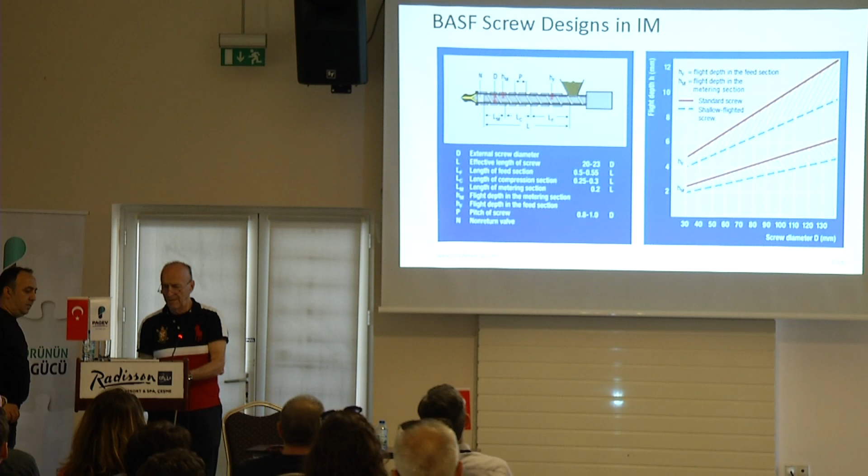Some people, Greg Campbell among them, say that rotating the barrel versus rotating the screw is not 100% identical. He's got some arguments. The result is that if the screw is shallow, has shallow channels, there's not really much of an effect. If it's a very deep screw, yes, there is an effect. But in extruders, the channel is shallow, not very deep, so there's no question that the approximation I'm using here, and also in my software, of rotating barrel, stationary screw, is really valid. But if it's a deep channel screw, very deep, there might be some differences.

We managed to do a thought experiment, what Einstein used to call in German, Gedanken experiment, for those of you that speak German. It's a thought experiment. We managed to form a device that could operate as a melt pump.

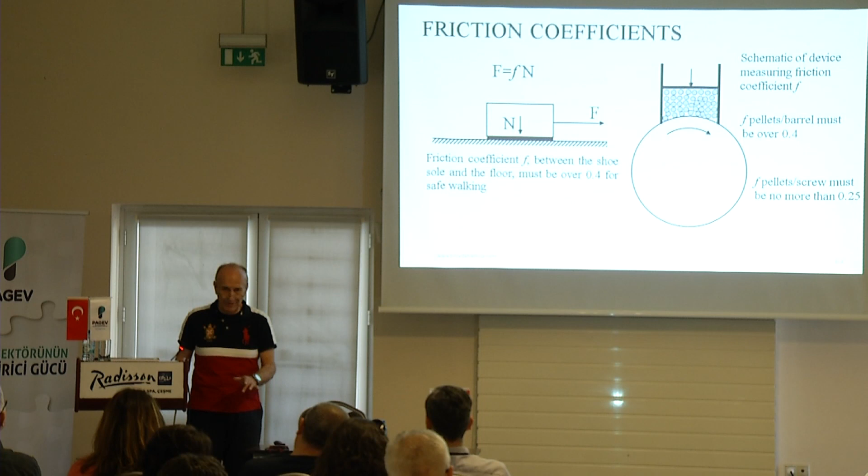My estimate is less than 0.4. It's a bit, which means in order, let us say, you need 40% of my weight to pull me forward, right? The friction coefficient in North America, because in particular the United States, when you place a floor anywhere, the lowest friction coefficient allowed formally is 0.4 between a typical shoe and the ground. Now, this one is a bit higher, and if somebody fell, the hotel is a bit responsible, and I have worked on a couple of cases as a consultant, like somebody fell and money is big.

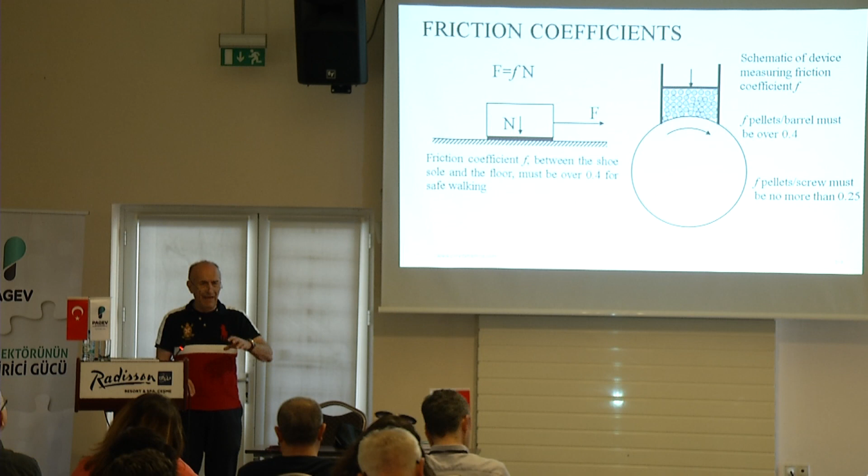So on the barrel, the friction coefficient should be at least 0.4. On the screw it must be shiny, low friction coefficient, should be about 0.25. So these are the ranges of friction coefficients that we like to have. On the barrel we like a coefficient of 0.4, and on the screw about 0.25. These are default values. I have a software package, which I sell commercially, with default values for a smooth barrel and a typical screw: 0.4 and 0.25, in order for the extruder to function in a normal way.

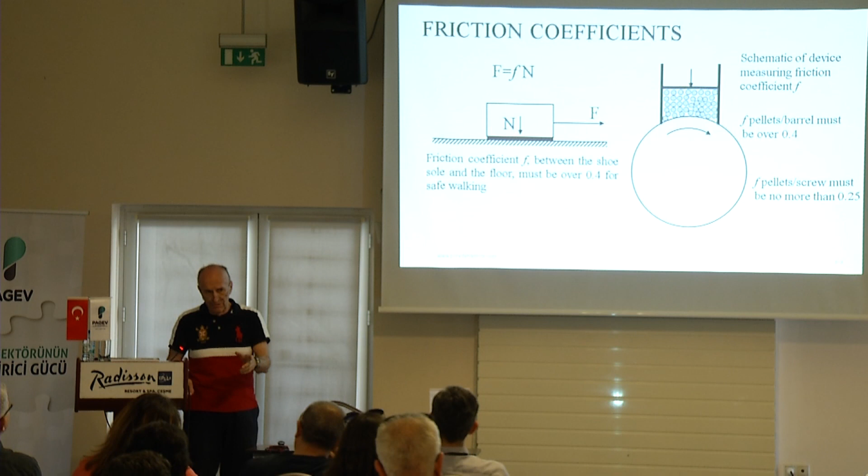Now, if I have a screw that is corroded or damaged, obviously the friction coefficient of 0.25 is going to go up, and it may not produce properly. I'm going to show you later on some screws in pretty bad shape, okay?

So I say the same thing again: solid bed, the barrel would have to have 0.4 and the screw 0.25. And typically then the pressure variation along the screw will be of that shape. This screw in that particular case is going to be a gradual build-up. Here we are compressing. This is the typical design of a screw: a straight portion where we do the feeding, then compression, which gives a pressure rise because you're compressing it, then a straight portion which is the metering section, and then of course a large pressure drop in the die. So this is what you get.

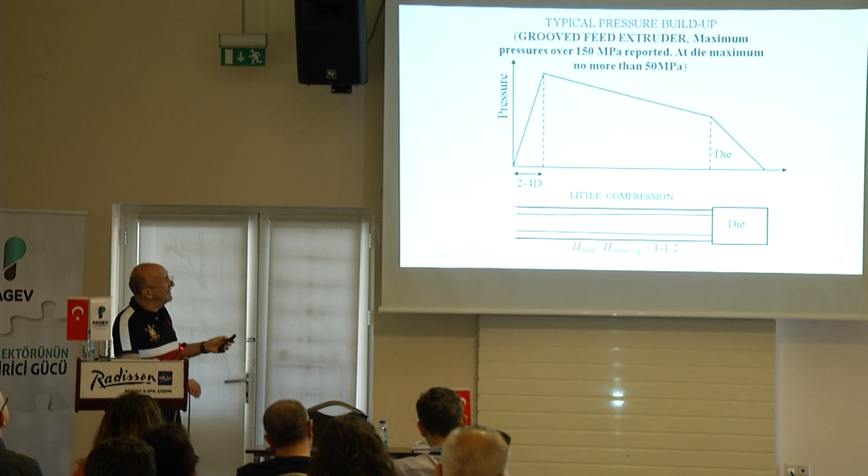So the pressure is very large, and you may really have problems, and it's rather difficult to design grooved feed extruders. Everybody can design and build smooth barrel extruders; it's not a complicated machine. You can buy a screw from somebody or design it and fabricate it yourself. But when it comes to groove-feed extruders, it's complicated. Yes, in Turkey, I know and have contacts with one company that produces groove-feed extruders. They're very good, they pump out a lot of material, because why?

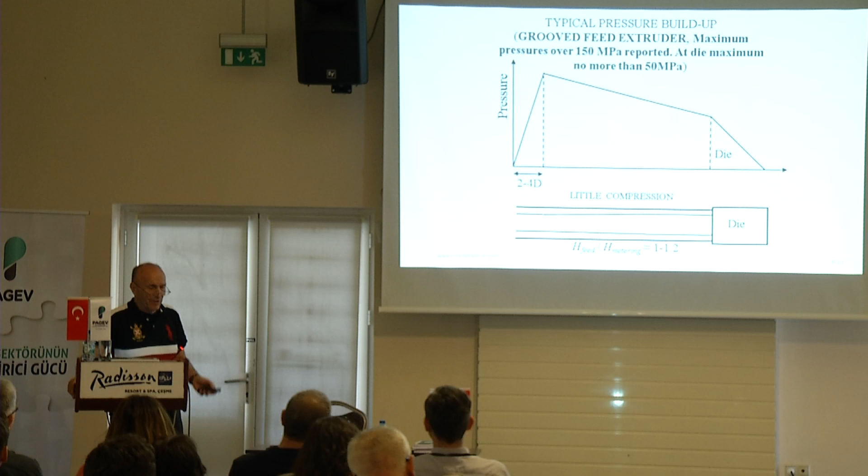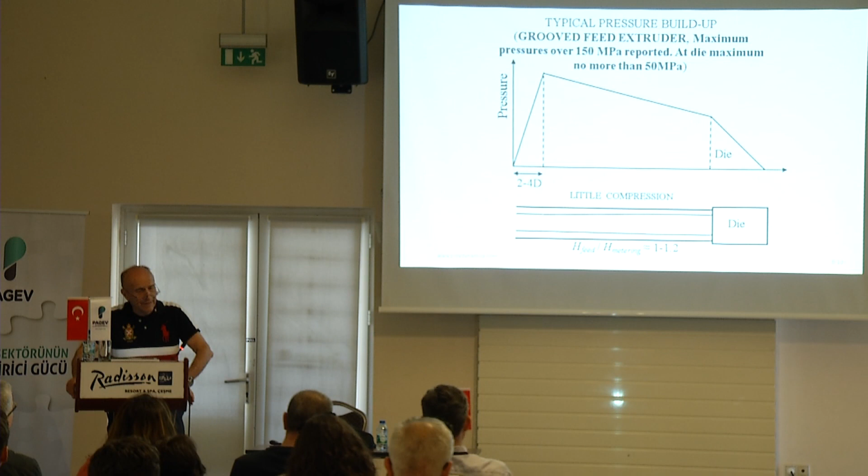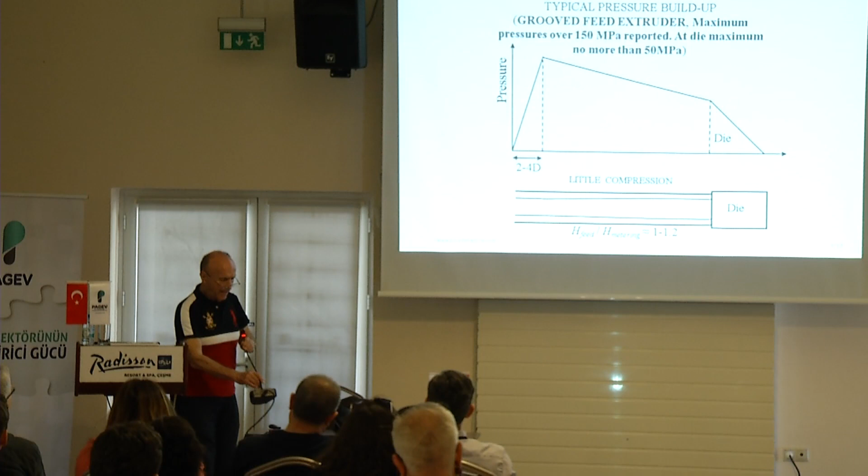Anything beyond that is probably too much. However, in the grooved feed extruder, we have at the start at least 150, and probably 200 and so forth, that is pushing the polymer. And right here, this screw does not need any compression, it's practically one. There is a little bit in this one, either no compression or 1.2 or something like that, just a little bit of compression. So there's a fundamental difference between screws for groove feed and screws for smooth barrel extruders, and the difference is that the pressure that develops is very large.

Now, do you see any problems? And I'll tell you what the problems are. Do you see any problems, potential problems, with groove feed extruders? What sort of? Say that?

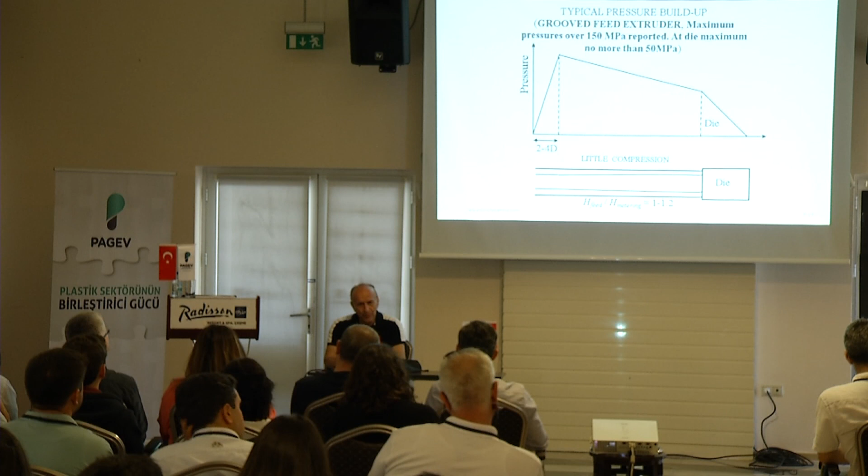If the polymer is too soft, it's not suitable. If you have flakes, you want a pellet that is hard but not super hard. For HDPE it works very well, polypropylene works very well. If you get something like polycarbonate, I doubt it would work.

Soft grooves? What kind of soft grooves are you thinking about? Soft groove and hard groove feeding, they separate in two in the articles which we read. Yeah, there is another idea which says there are soft grooves and hard grooves. Soft grooves make it easier to feed also some flakes as well.

Generally, the feed material can be problematic, depending on what kind of material you feed and so forth. But they work very well, you know. If you have good pellets, but with other stuff, sure, it may work. But my experience is that I would recommend grooved feed extruders for good material, good pellets.

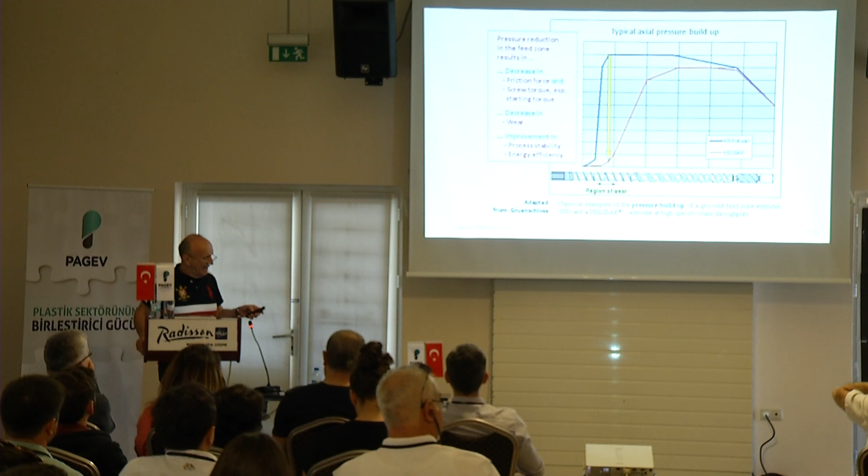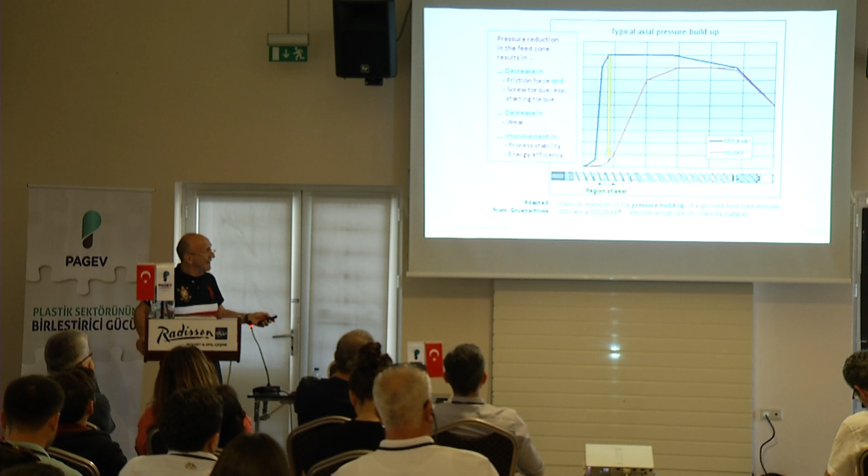In his case, he claims at least that with the entire barrel grooved, the pressure is more gradual, and eventually he gets higher output. To tell you the truth, I'm not quite sure how it works. The analysis is not exactly clear why it works, but I'm just presenting you the results as I see it.

There have been contributions on very high speed single screw extrusion by Wortberg, and by Battenfeld Cincinnati. Some of you may know the names of John Cristiano and others, and Cristiano reports from a 63.5 millimeter, that is 2.5 inch, extruder. At 1200 RPM, you get 1400 kilograms an hour, which is a lot.

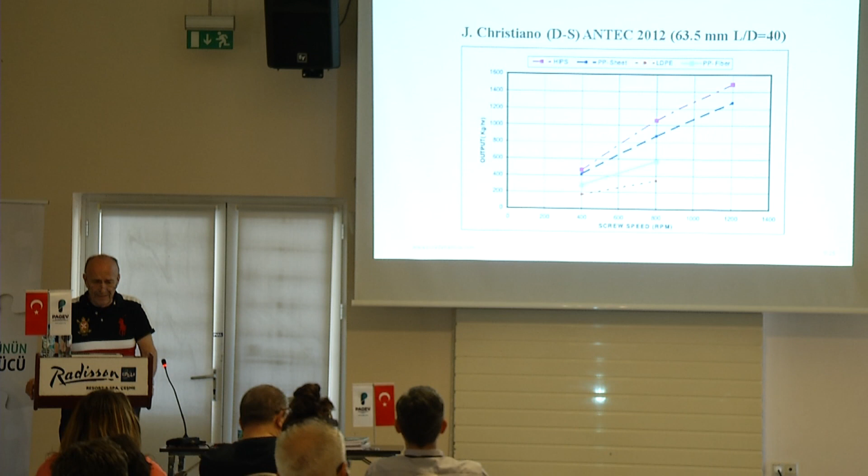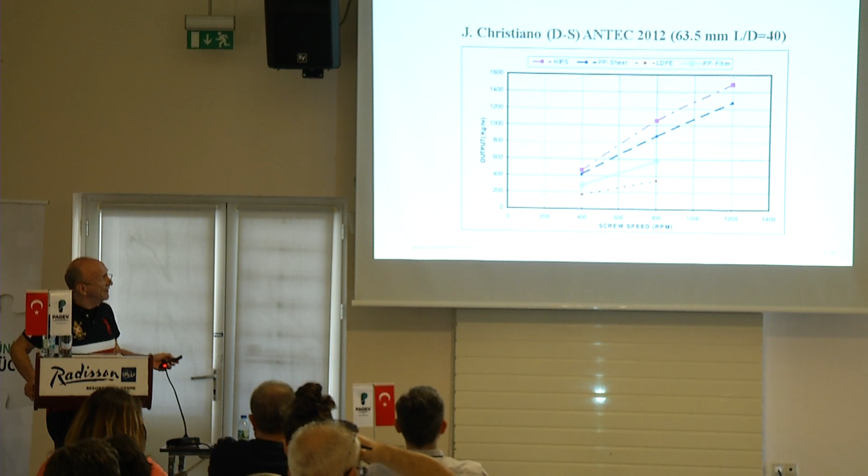There are reports, there are references, and you can check it for yourself. This is some result, again from Cristiano, from Antec, as you can see, what kind of outputs you get with this kind of high-speed machines. L over D is rather large, but you see 1400 for that kind of material, 1200, it's a lot of output.

Now, the same thing is shown from Battenfeld Cincinnati, which is a very well-known German company. I know they sell a lot of extruders, also in Turkey, I know they sell extruders. As you can see, you get a lot of output, although they did not specify.

This is from a plastic pipes conference in Berlin in 2016. I attended, and I have the proceedings, and you can see sort of what outputs and temperatures you get. But they don't say the screw RPM, it's normalized, I guess, for reasons of proprietary knowledge. They do not disclose it.

The problem I had with these extruders, they are fine machines, great output. The problem I have is mixing. You pump out a lot of material, but I told you this morning that mixing is very, very important. To start with, any extruder, whether it's slow or fast, it is not a very good mixing machine. Although you see things rotating and whatever, you add a Maddock dispersive mixer, but it's not a very good mixing machine.

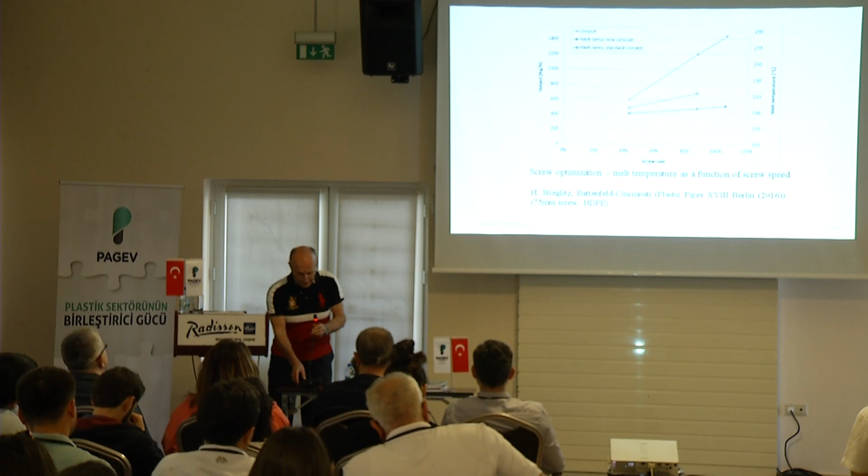If you really want to do mixing, good mixing, you need co-rotating twin screw extruders with wide discs, what I showed this morning. With single screw extruders, mixing is never very good. And when you have high outputs, it might be worse, okay? Some people, I told them, you may not need the output. I've been in extruder plants where they had high output, high speed, but they didn't really need it. They needed quality. So something to think about when you buy or when you inspect an extruder plant.

Now, for power requirements, the calculations are rather simple. What we want to do is calculate the power that is inputted by the screw by determining the energy required for the polymer temperature to be raised, the energy required for the temperature to be raised from room temperature to, let's say, the extrusion temperature of 250 degrees; the energy required to melt the polymer, meaning the energy we have to supply to overcome the heat of fusion, which is the opposite of heat of crystallization; and the energy required to pump the polymer.

Here I do some calculations, explained after that, and from them you will see that most of the energy inputted comes from the rotating screw, which is what melts the polymer. The heater bands only contribute a small amount. Most of the energy, 80%, is coming from the rotating screw.

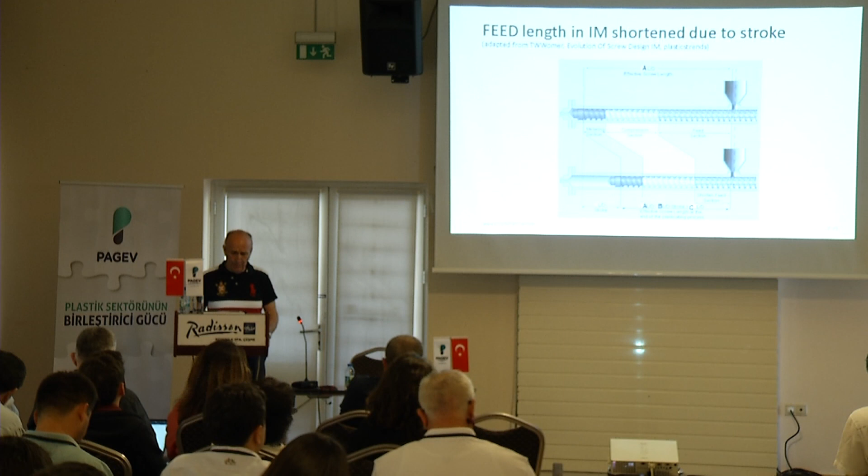The differences between screws in extrusion and injection molding: generally screws used in injection molding are shorter. In extrusion, we need the extra length because we have to build pressure, built up by the long metering section, which is not the case in injection molding. So generally speaking, injection molding screws are less sophisticated, simpler. However, they're getting improved in recent days. I have some numbers there for you to look at.

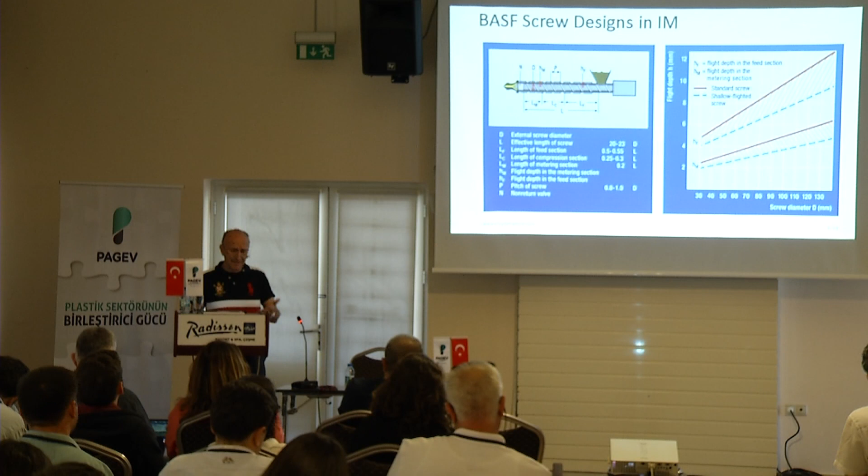Helix angle - there are some recommendations from BASF. Again, these are numbers for you to look at. If you're at a university, you may want to give it to a student for a screw design and so forth.

Now we come to a very, very important subject. After groove feed, the most important subject is the question of barrier screws. What is a barrier screw? Well, first of all, it's not a double-flighted screw.

In a barrier screw, we have a main flight and a secondary flight. It's also possible to have a double-flighted screw - you have one screw and then a second. This is a screw design, but it's not a barrier screw design. Read my lecture notes, my book, for more information about this and why they might sometimes be beneficial.

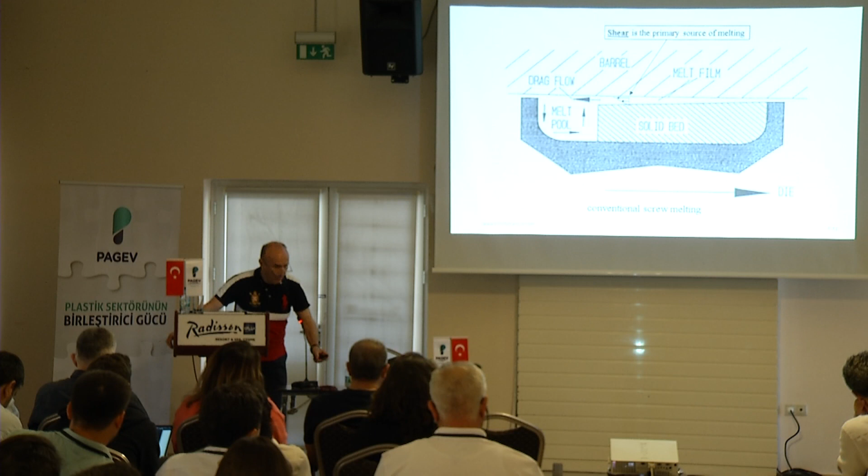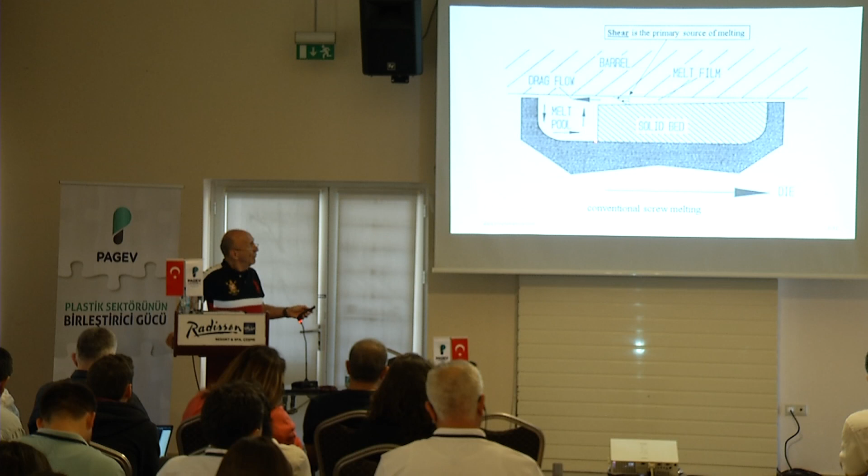Now, how was the screw design developed? We have this melting mechanism from Bruce Maddock, where we separate the solid bed from the melt pool. Well, what if we actually put another screw right there, where the solid bed ends - a barrier screw, to separate the solids from the melt pool? That's the basic principle, but this principle has generated a lot of designs.

Okay, this is the screw without a barrier. What I pointed out already is that if in the channel I have unmelted pellets or chunks of material that haven't been melted, they just float, or swim, really, in the melt. They are not likely to get melted, so it's better to squeeze them, to force them against the barrel.

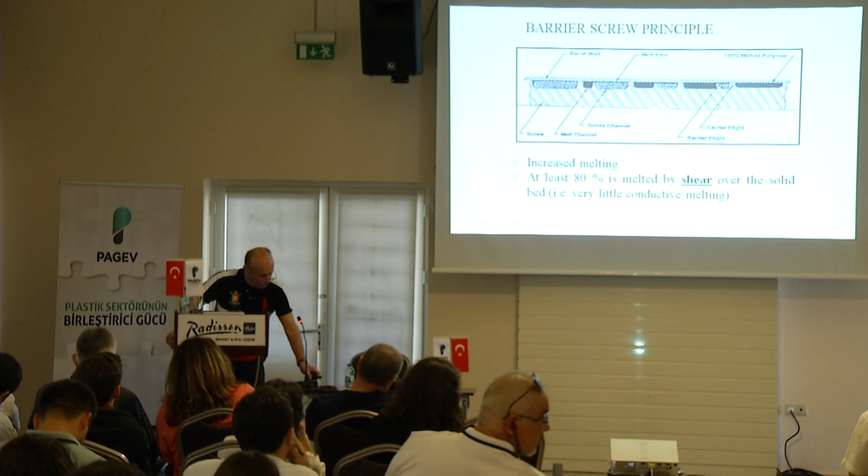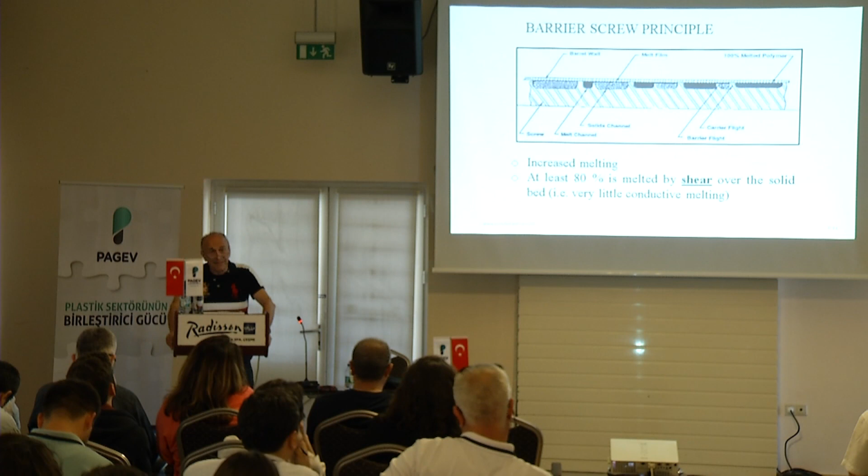And this is the birth of the barrier screw. You see, now I have the previous geometry, but I segregate the solid bed from the melt pool, and eventually I only have 100% melt. So this is a better melting machine, all right?

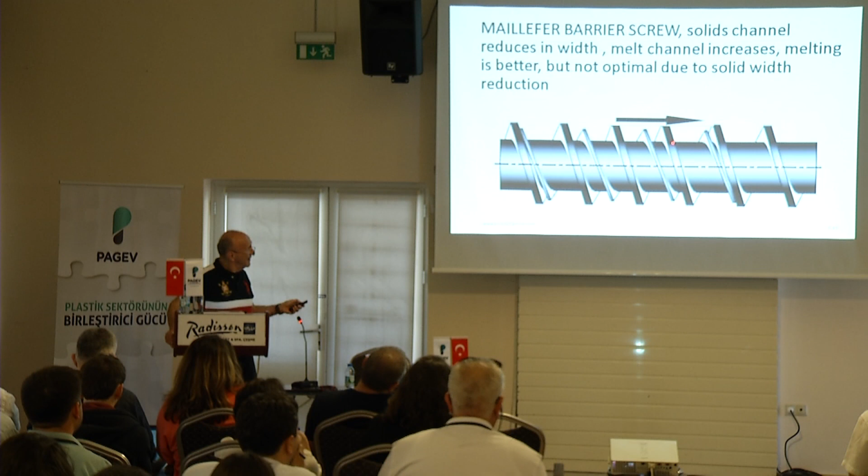This is a sketch closer to a mechanical design, as invented by Maillefer probably around 1960. You see, you have the main flight, and you have the barrier flight. In this section you would have solids, and right here you would have melt.

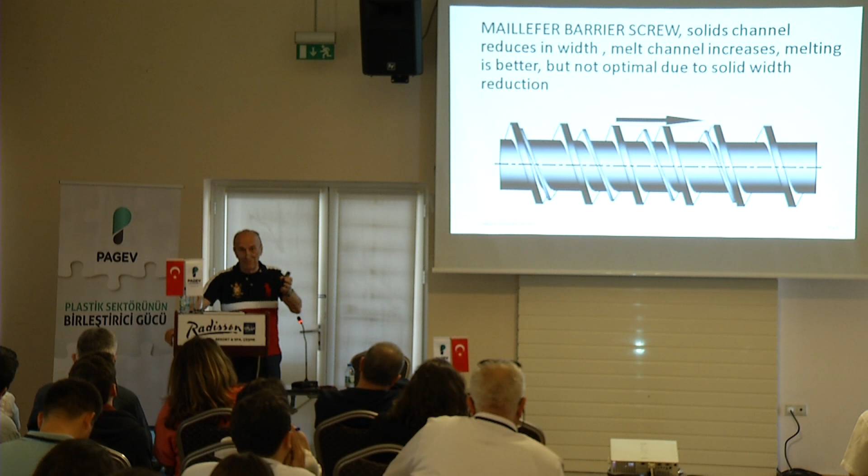So the solids part becomes smaller and the melt becomes bigger, and hopefully - this is more difficult to design, because how do you know whether solids have been melted and how much? This is tougher to design, but they work very well. I would say most modern screw designs are of this variety.

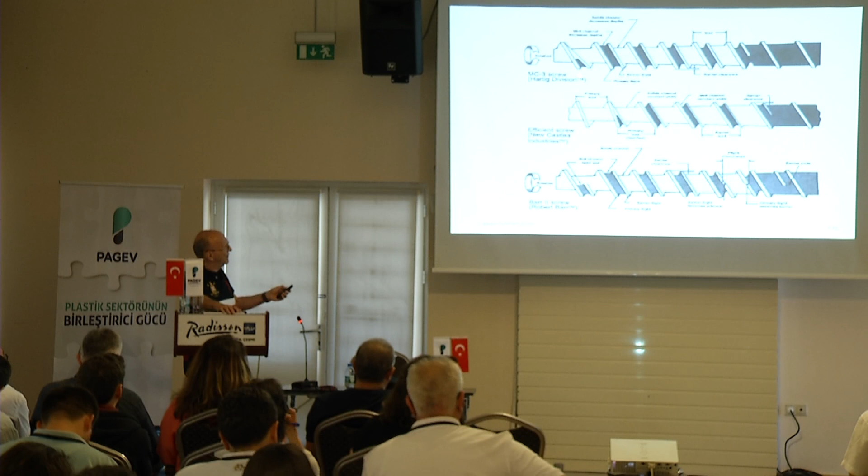That is, they are barrier screws, and they are different - a lot of patents out there. This one, over there on the top, is referred to as the MC3 or HDPE screw, whatever. It is really the Maillefer screw.

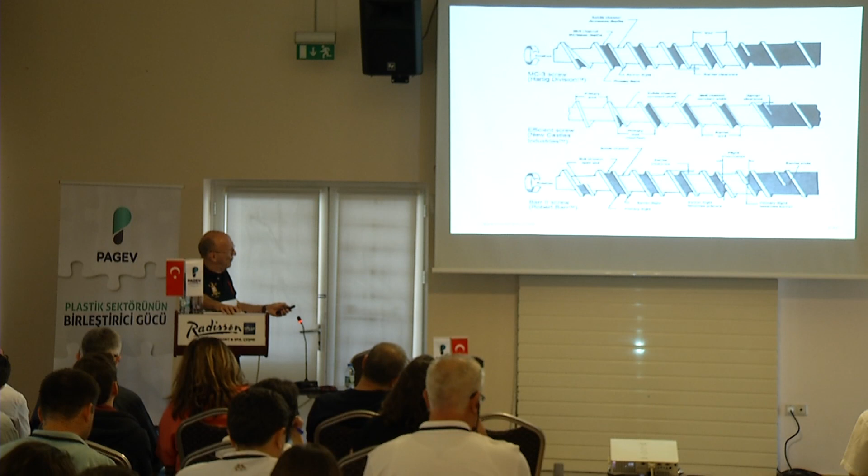This is another one, the Barr 2 screw, in which case you can change either the depth or the width of the channels. In the Maillefer case, the width is changing; in the other one, the width remains the same.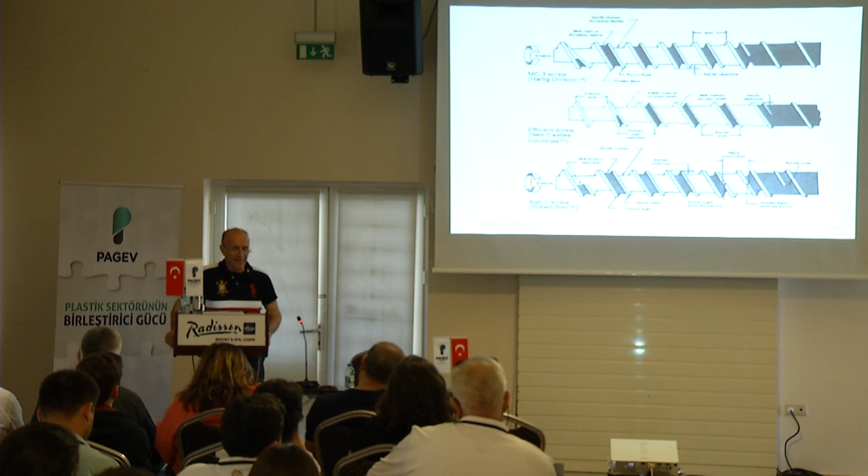So there are a lot of different designs. You will find some references in my book, but there are different designs that work very well, and most likely any modern screw you see anywhere is going to be of the barrier variety, like this. Generally speaking, it's more difficult to design them.

I do have a software package, and I use it, and it is used in industry to do mixing sections. Well, I think I've already mentioned that single screw extruders are mostly melting and melt pumping machines. There is no dispersive mixing, really. In the barrel, what I'm doing is shearing all the way through.

So it makes sense to add a mixing section. Perhaps the most common and most successful mixing section is the one proposed by Maddock - same guy, Bruce Maddock, who did the experiments on mixing. What happens is the polymer gets in there, and here it has something like a barrier, forcing the polymer to travel over this barrier to the next channel. And here is the view on the other side.

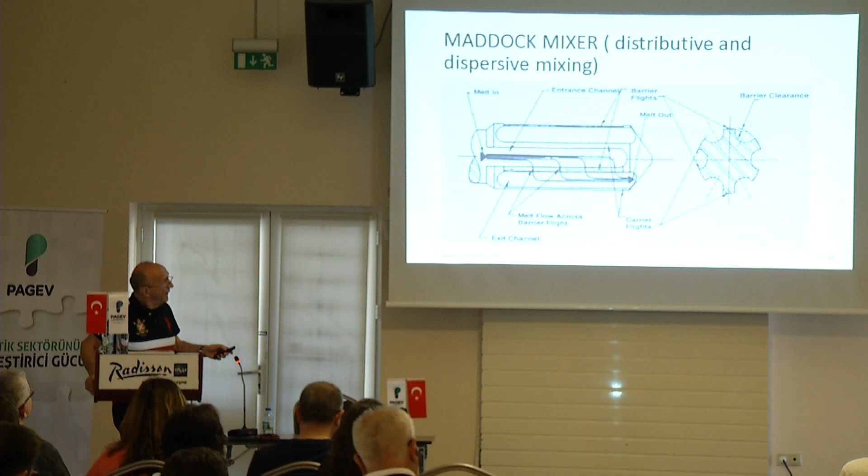And this is another picture - I have this one from Bruce Maddock himself, he gave a talk a few years ago. You see inside the channel you do have some circulation, which is good for distributive mixing. And over this barrier, as it goes over, the polymer in this region is being squeezed, which means the flow is elongational. That is why these mixers are referred to as dispersive mixers, like Maddock, and there are other variations.

In fact, this so-called Egan mixer is again distributive and dispersive. Again, you're forcing the polymer to go over - you have the polymer there, now it is slanted, not like a barrier, but you're forcing it to go over this barrier to the next channel. Some people think the Egan is a little bit better than the traditional Maddock mixer.

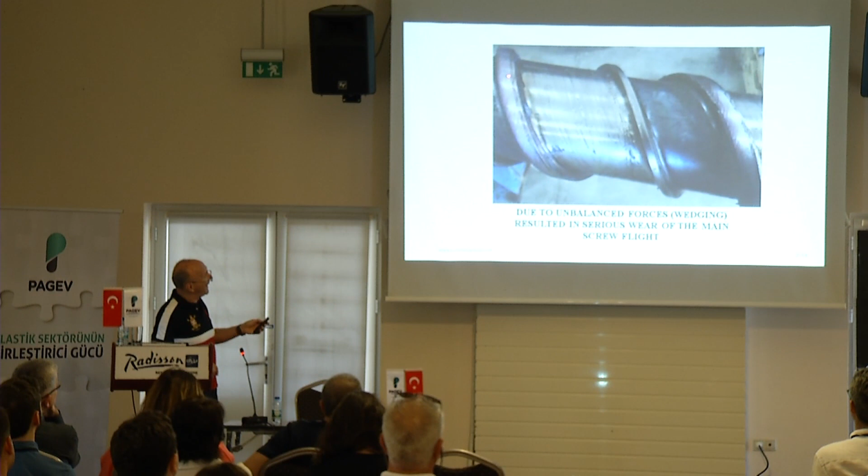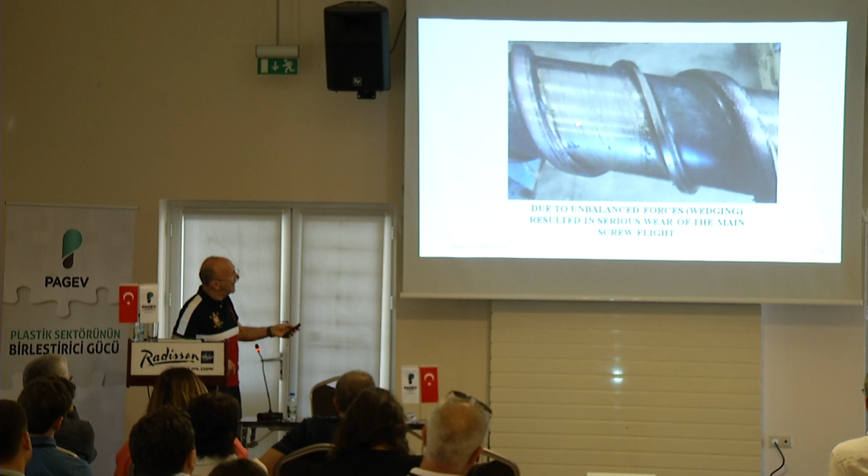What happened is, in this case, you see, what happens is that this screw, the flight, was pushed against the barrel, and you see something is cut off from here. Now these pieces of metal, they go inside, and of course they scratch the surface of the screw. And of course the customer is complaining. He says, well, we don't get output, poor performance.

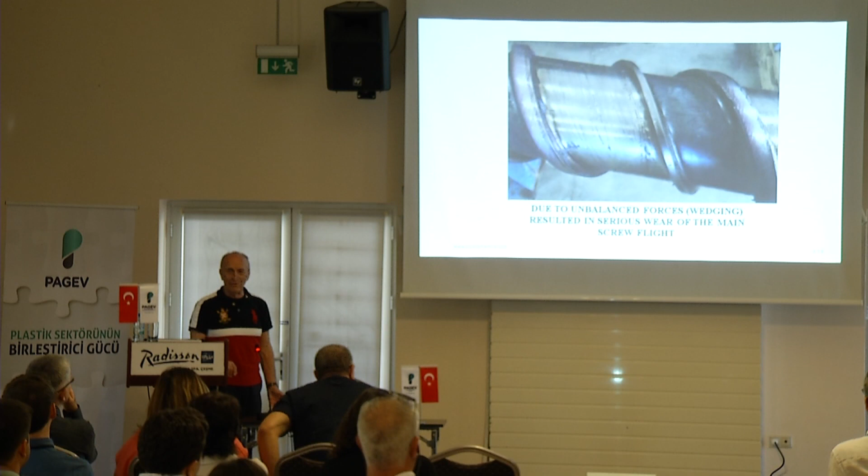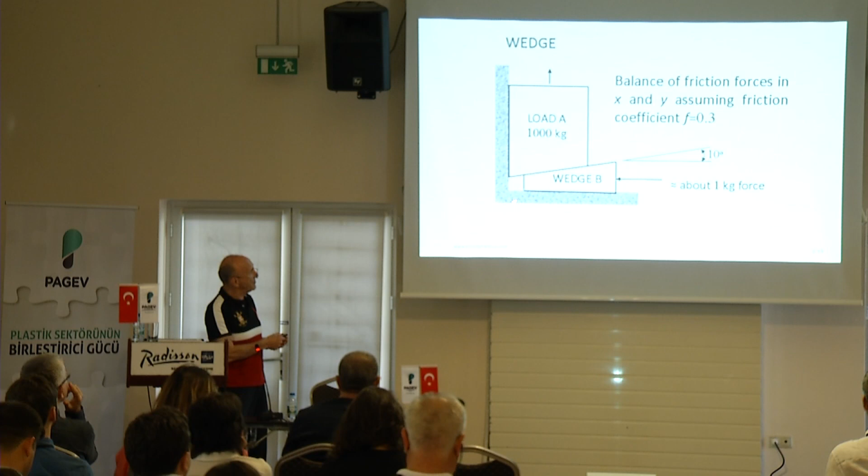Well, what do you expect? Now, why does this happen? It's a classical case of bed wedging, like a wedge. What is wedging? Well, you know that. This is a typical homework assignment that I did in high school. You put a wedge here, and you force it down, and you can lift a lot of weight with a wedge. The same thing happens in the screw.

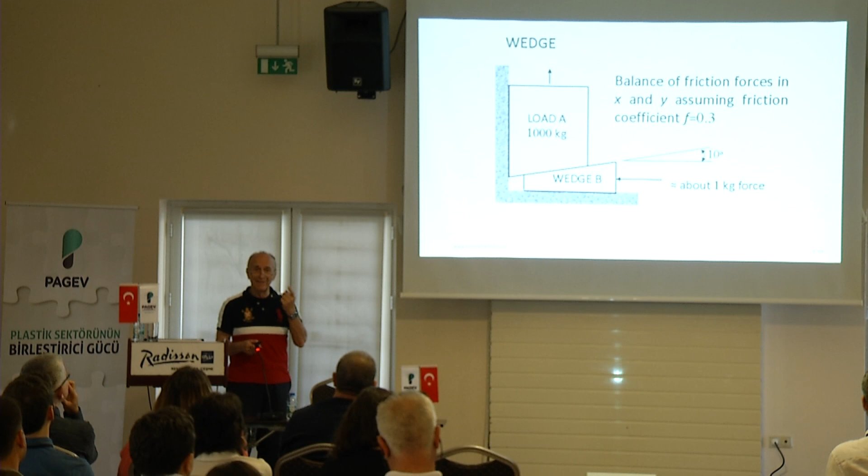A little bit of solid polymer gets somewhere on the screw, pushes one side of the screw against the wall. It doesn't take very much. You see, let's say this one with 1 kilogram force - this is a typical high school or first year mechanics problem. With 1 kilogram, you can lift 1,000 kilograms, so that you bend the screw.

Jim Franklin did some calculations. I'm not sure how he measured or did it, but anyway, my calculations from a simpler experiment of bed wedging with first year university mechanics gave me pretty much the same results. Occasionally, there's melt blockage.

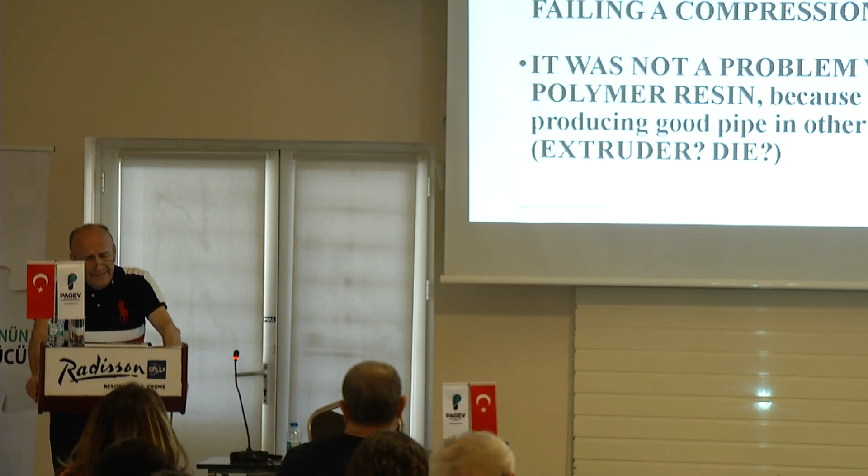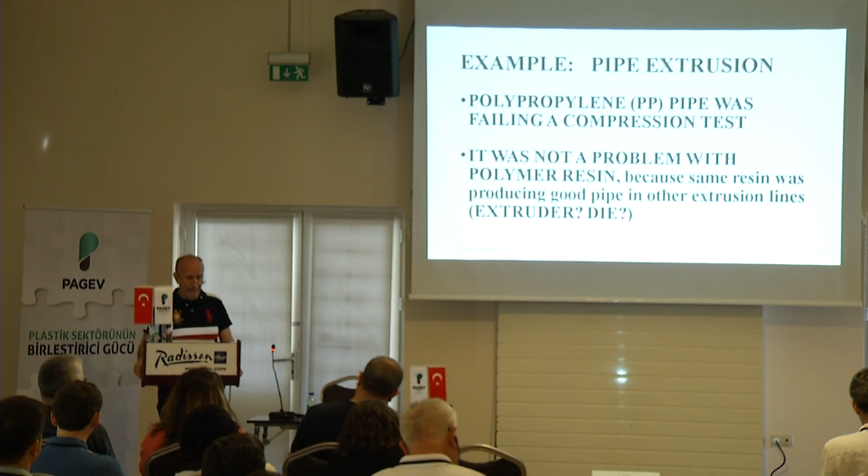I'll give you an example of pipe extrusion. It was in Europe, a northern European country. The material was polypropylene, and it was production of corrugated pipe, and the material was subjected to a compression test.

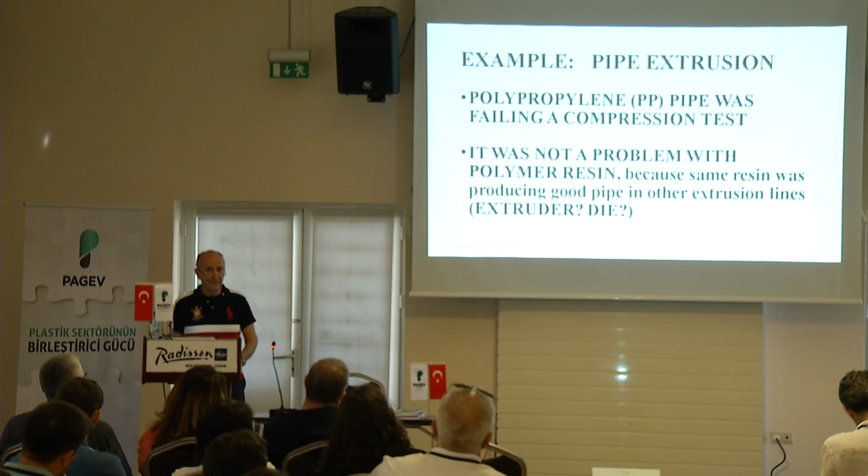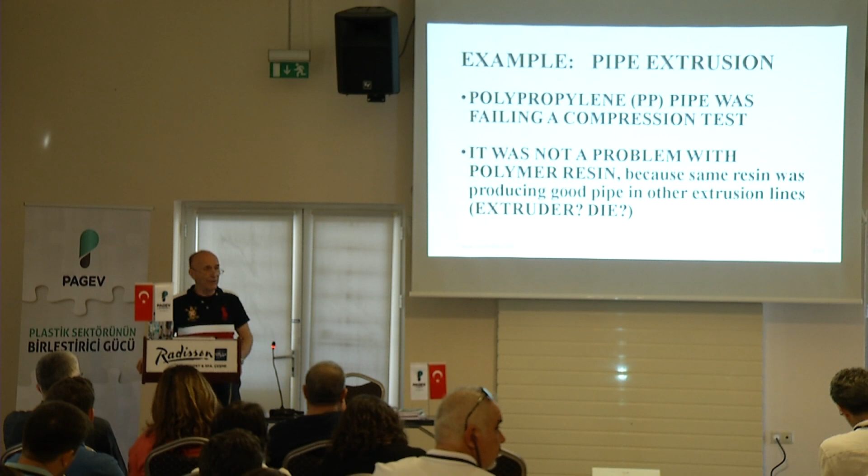We were trying to figure out where the problem material was coming from. We thought in the beginning that it was a problem with the resin. We took the resin and measured viscosity, tensile testing, and it passed all our university tests. However, in the plant test, a compression test, an ASTM standard test, it would fail. Question is why?

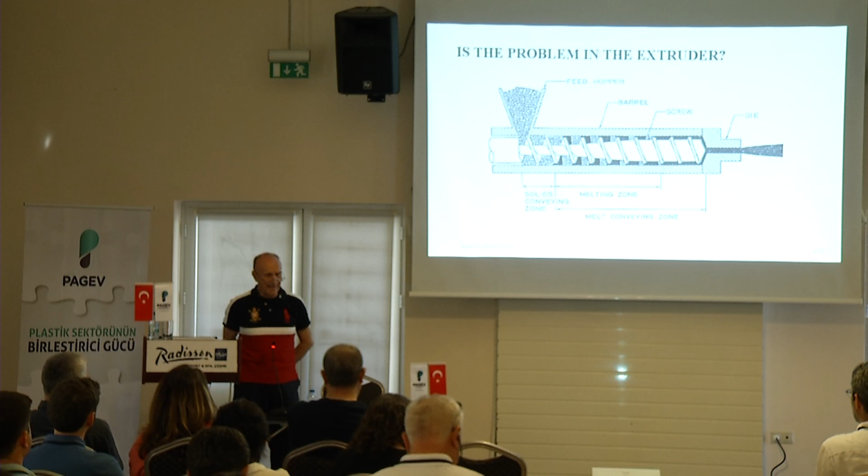I suspected the extruder, because polypropylene does not melt as easily as HDPE. I knew that the supplier of the extruder and the screw had a lot of experience with HDPE, and I thought maybe these people used a similar screw design. So I suspected that one.

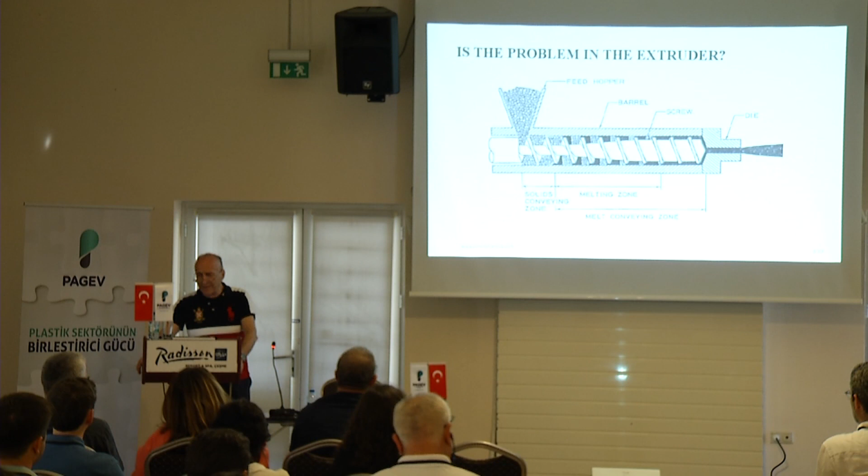There was nothing unusual in the die. I checked the die, and there was nothing there. So I suspected, again, that I probably had trouble with the screw design itself.

Because what is known in industry in general is that polypropylene melts about 30% less than HDPE under the same conditions. I'm not really sure why. We did some work and might take another look at it, but I'm not quite sure why. The net result is that polypropylene is rather difficult in melting.

So we wanted to see what really happens, and I did a computer simulation with my extrusion software package. It was a very long screw, L/D 40. I discovered that at the end of the screw, the software determines the melting. At the start, under the hopper, you have 100% solid, and we determined the width of the solid bed. At the end, we had quite a bit, about 10% predicted unmelted material.

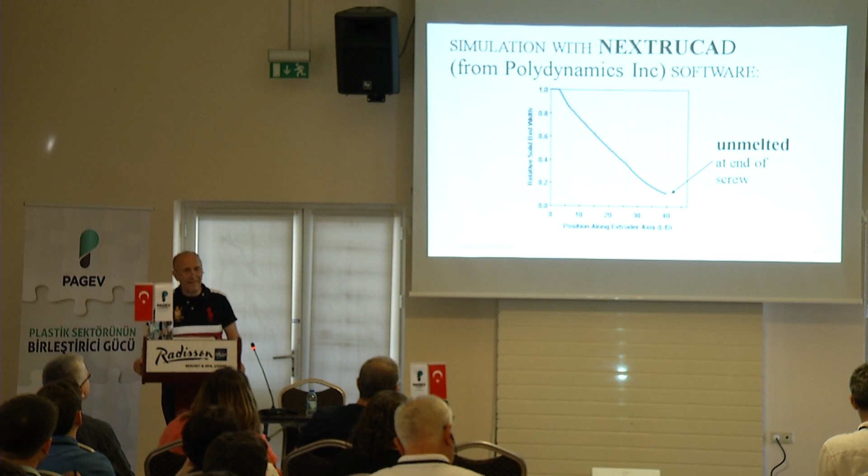But again, would they trust me? The extruder manufacturer questioned the ability of my software, asking me about parameters, and some parameters, truly, I would have to guess. What is the friction coefficient between polypropylene pellets and the barrel? Well, I guessed one. Did I measure it? No, I made a reasonable guess. So we could not really convince them.

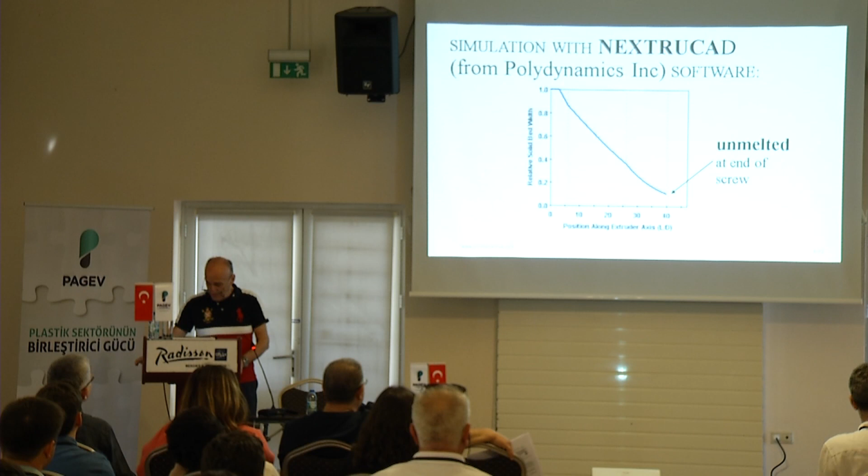Material is unmelted. If you have material like this, you're not going to make good pipe. That was the problem. A new screw was designed, and the problem was solved.

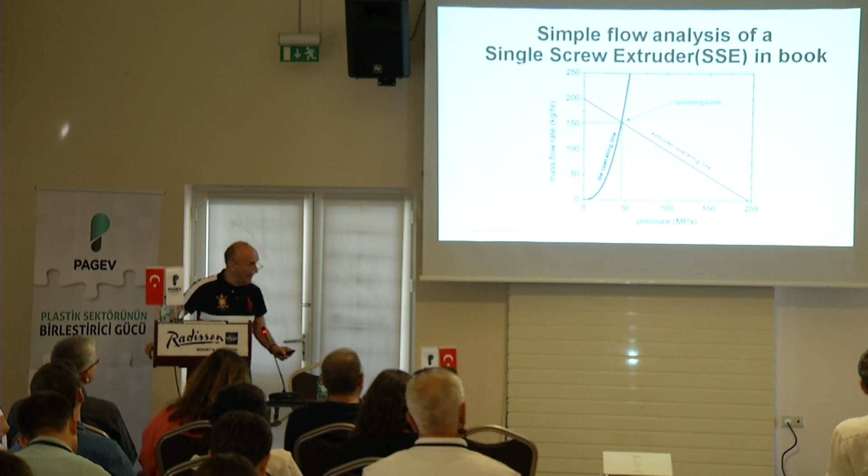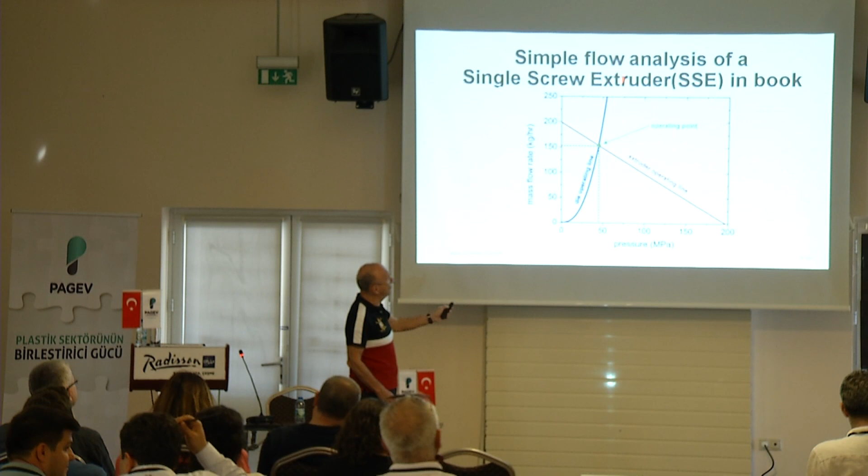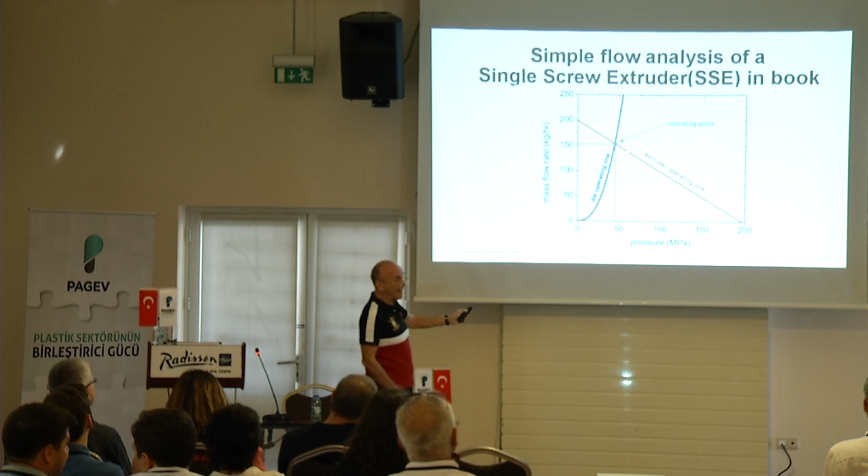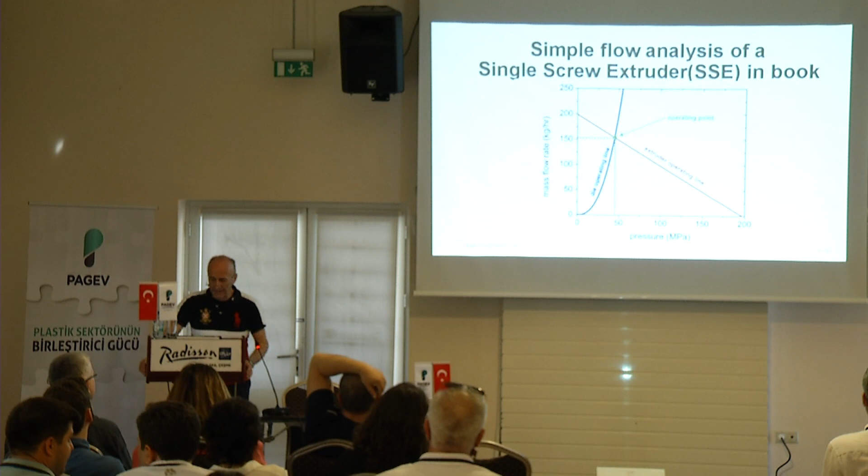Now, before we finish for coffee, I have a simple example that I mentioned in the book, which I strongly urge anybody interested in extrusion to try. We calculate an equation for the performance of the screw, and another one for the die. Where they intersect is the operating point, giving you the output and the pressure. I go over this in great detail and compare it to extruder simulation. We got very good results.

And the results of the extruder simulation are like this. You can predict the pressure, you can predict the output, all the things that I talked about. And of course, with the extruder output, you can predict the temperature and the solid bed. Pretty much all you need for the design of an extruder, the design of a barrier screw.

The problem that I have is that it is a difficult job, because I have poor information. Data are not very good. For example, I can measure viscosity, no problem. But when you ask me, I need friction coefficients. And there are other questions. How do I know where the melting starts? I have to make some guesses.

We have a melting length or something like that in there, and we have to make some guesses. So in a way, we have built a software package with which we can predict the performance of an extruder, including simple screws, barrier screws, screws with mixing elements. But we're short of very important information, data especially related to solid bed performance.